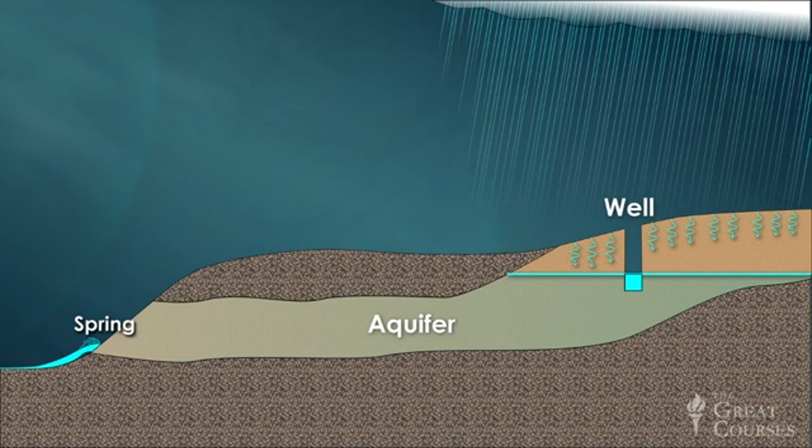So, what are the relative merits of groundwater versus surface water as sources of drinking water? Well, practically from the dawn of civilization, humans have obtained groundwater by tapping into underground aquifers. Recall that an aquifer is a porous stratum of soil or rock in which groundwater collects.

Groundwater can be obtained from an aquifer in two ways. One is to dig a well down into the aquifer, allow the water to collect at the bottom, and then lift or pump it up to the surface. The other is to find a spring, a place where an aquifer intercepts the surface, resulting in groundwater flowing freely back to the surface like this.

Now, in the ancient world, these groundwater sources were generally preferred over surface water because early civilizations usually dumped their raw sewage into rivers and streams, thus making the surface water unsuitable for human consumption.

Today, groundwater sources, particularly wells, remain in widespread use, particularly in rural areas and small municipalities. However, wells generally don't provide an adequate quantity of water for larger urban water systems, and they're unsuitable in regions where the groundwater is subject to pollution or is too far below the surface to be economically extracted.

Meanwhile, modern measures for controlling water pollution and more effective water purification technologies have resulted in surface water becoming the principal source for most large-scale water systems today.

A water supply system for a large urban population typically includes six major elements: a watershed, a raw water collection point, a conduit through which water is transmitted from the collection point to its point of use, a water purification facility, water storage facilities, and a water distribution network.

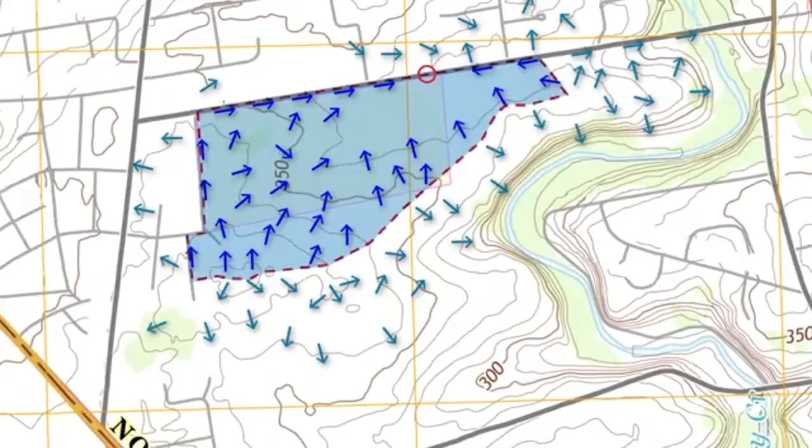Remember, a watershed is an area of land delineated such that a drop of rainwater falling anywhere on that area eventually drains to the same outlet. Thus, a watershed serves the very useful function of collecting the precipitation falling on a large area of land and then concentrating it in a single watercourse, where it can serve as the source for a water supply system.

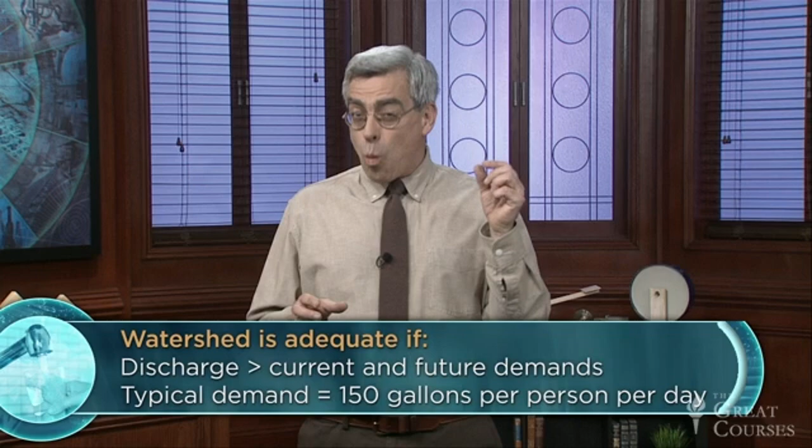A given watershed will be adequate as a water supply for a city or town if the quantity of water discharged from the watershed exceeds the current and anticipated future demands of the population being supplied. The demand on a municipal water supply system is typically estimated as about 150 gallons per person per day.

No, people don't actually drink that much. Most of this water flows through our dishwashers, washing machines, sinks, toilets, tubs, and showers, at which point it becomes wastewater and is disposed of. Still, whether we drink it or shower with it, 150 gallons per person per day is a lot of water.

At this rate, a modest-sized town of 10,000 people consumes 1.5 million gallons per day, or over 500 million gallons per year.

Some cities are able to meet this huge demand by drawing water directly from major rivers or lakes. For example, Philadelphia gets its water directly from the Delaware River, and Chicago from Lake Michigan. And by the way, in case you were wondering, Chicago's annual consumption of water constitutes roughly 1/100th of a percent of the water in Lake Michigan, an amount that's easily replenished by the rivers and streams flowing into the lake.

Now, in most cases, the quantity or quality of a municipality's local water supply is inadequate, and it must look to a watershed some distance away, often in a less developed region with fewer sources of pollution.

Even if a given source provides an adequate quantity of water on an annual basis, seasonal variations in rainfall, and therefore in stream flow, might cause shortfalls at certain times of year. To cope with this, the typical urban water supply system uses a dam to create a storage reservoir which receives a variable inflow but holds enough water to provide a steady outflow.

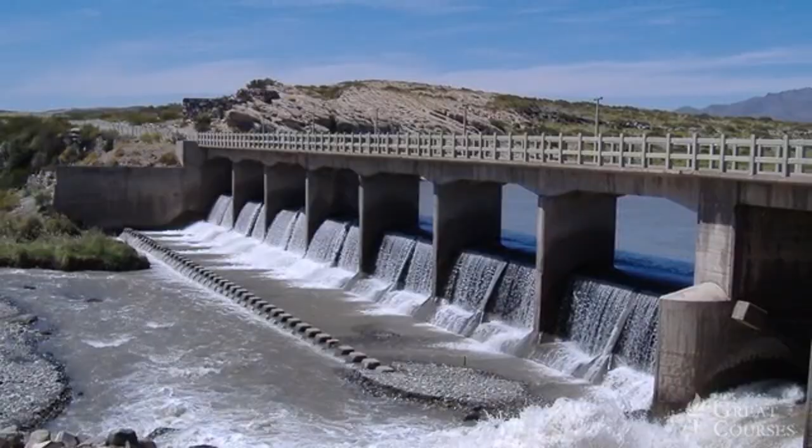No aspect of everyday engineering better exemplifies the grandeur of our civil infrastructure than a dam. So let's talk about dams.

A dam is an engineered structure designed to impound water, generally by blocking the flow of a natural watercourse. A dam creates a reservoir and must also control the release of water from that reservoir.

Dams are used for water supply, irrigation, flood control, and, as we'll discuss later in the course, for the generation of hydroelectric power. They also create recreation areas, though this is generally a positive side effect rather than the principal purpose of a dam.

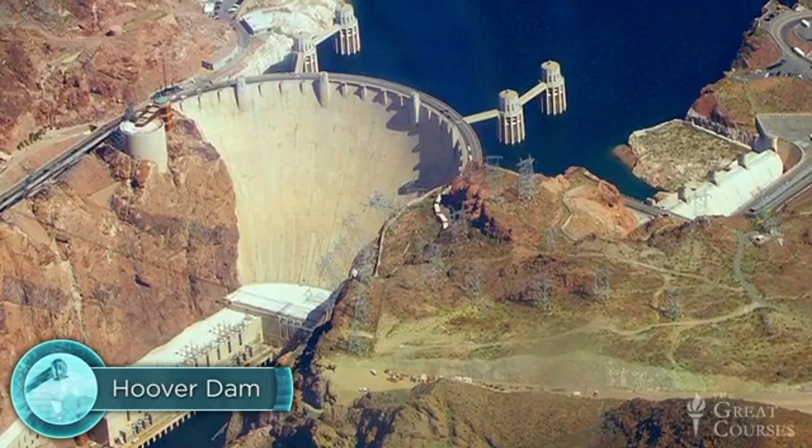Many dams serve several of these purposes simultaneously. The iconic Hoover Dam, for example, was originally intended primarily as a source of irrigation water, but it also incorporates a huge hydropower generating facility, supports a wide variety of recreation facilities along the shores of Lake Mead, and it has occasionally mitigated the effects of Colorado River flooding.

A dam is generally classified according to two characteristics: its principal construction material, which might be concrete, masonry, soil, or rock, and its structural configuration, either an arch dam or a gravity dam.

Let's start with the arch dam, and more fundamentally, with the arch itself. When an arch is used in a bridge or a building, it's generally oriented vertically like this, and the loads that are applied to it are applied vertically as well.

An arch carries load primarily in compression, and it can carry a tremendous amount of load, provided that two critically important conditions are satisfied. First, it must be made of a material like concrete or stone that's very strong in compression. Second, it must be laterally supported at its base to restrain the ends of the arch's natural tendency to spread outward as it's subjected to a vertical loading.

My model here is made of concrete, and it does indeed have appropriate lateral supports represented by these two pieces of wood out at the ends of the arch. So it ought to work reasonably well.

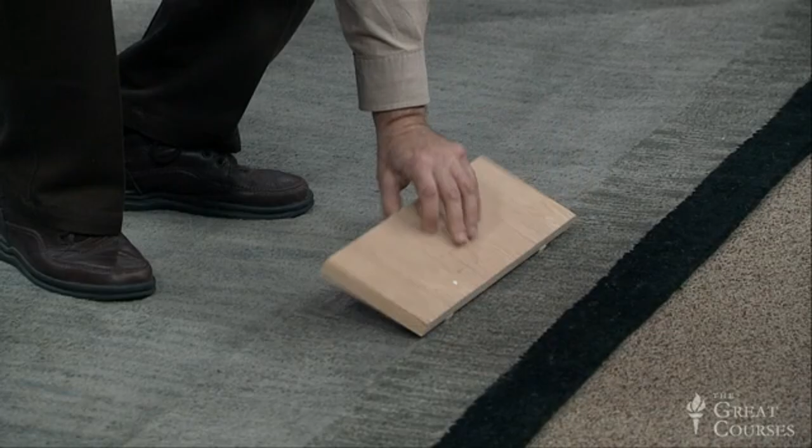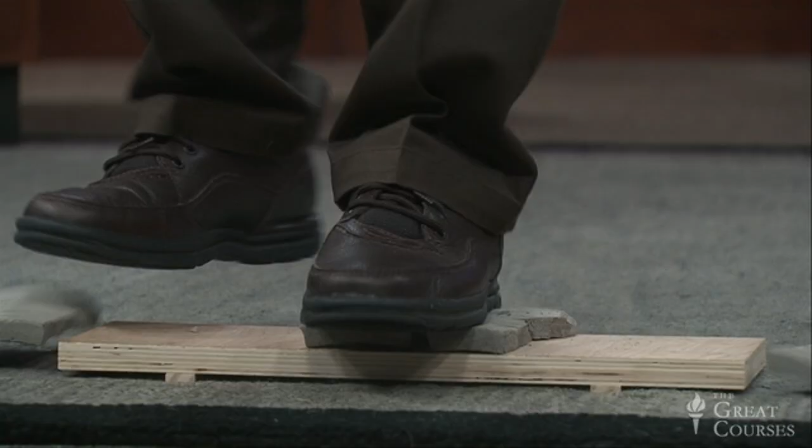However, if we take the same arch and put it on the same supports, but flip the support upside down so that those lateral restraints are no longer engaged, and apply the same load to the same arch, the effect is considerably less favorable.

Now let's take an identical arch right here, and we'll turn it sideways, and we'll place it in a river valley to create a dam. Now we have an arch dam, and at this point we're ready to fill our reservoir.

Not bad. It leaks just a bit because I didn't have an opportunity to seal it after I installed it, but structurally this dam works just fine because both the arch and the load that's applied to the arch are now oriented horizontally. The load is hydrostatic pressure.

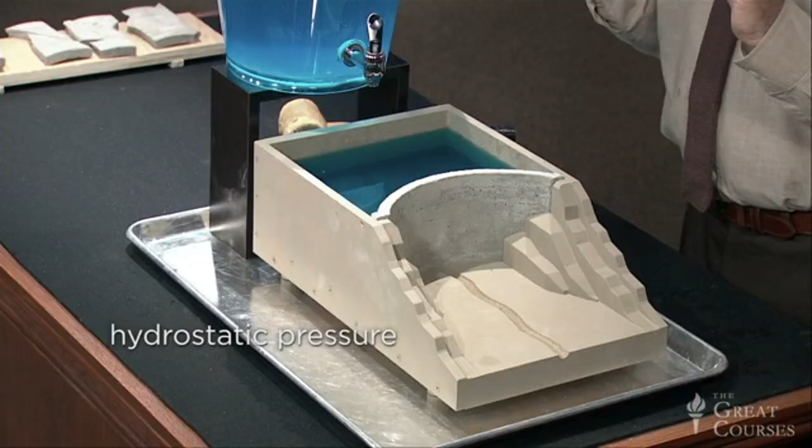That's the same pressure that's applied to your basement walls by groundwater. As you recall, hydrostatic pressure always acts perpendicular to a submerged surface. Here, the submerged surface of the dam is vertical, so the pressure is applied horizontally.

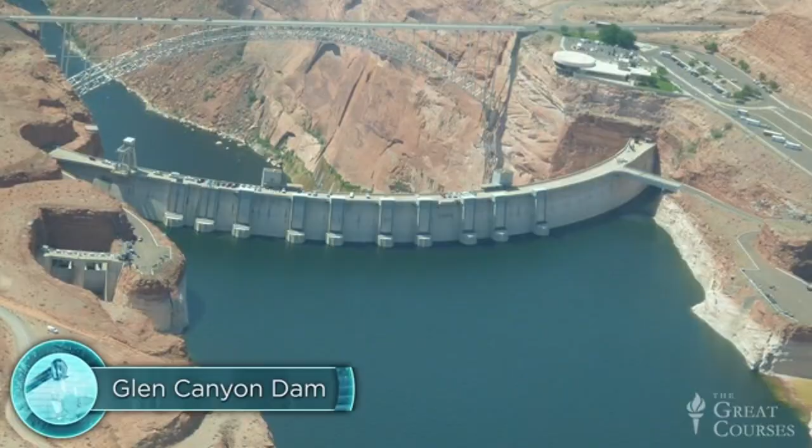Note also that the lateral support to this arch is provided by the walls of the river valley. And that's why dams like this one, the Glen Canyon Dam in Arizona, are always built in steep valleys with solid rock walls.

The other major structural configuration is the gravity dam, which attains its structural load-carrying capacity primarily from its mass. There are two principal types of gravity dams based on whether the construction material is concrete or masonry on one hand, soil or rock on the other.

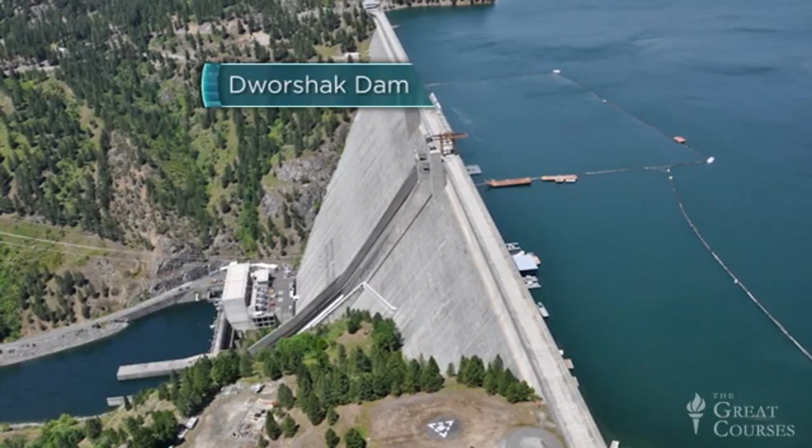The Dworshak Dam in Idaho is a fine example of a concrete gravity dam. Note that this structure isn't curved, so it doesn't rely on arch action to carry load. So how does it carry load? Well, let's use a diagram of the dam's cross-section to answer this question.

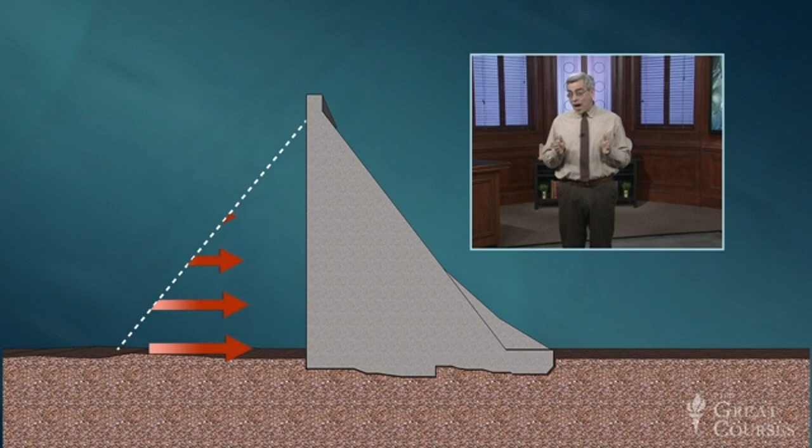Because the dam's upstream face is essentially vertical, the hydrostatic pressure acts horizontally upon it. Assuming the concrete itself is sufficiently strong, there are really only two ways that this structure can fail: it can either slide horizontally or it can tip about its toe, like this.

As long as the base of the dam is keyed into solid bedrock, as you see here, it can't slide. Thus, the design of the dam's cross-section is governed primarily by tipping.

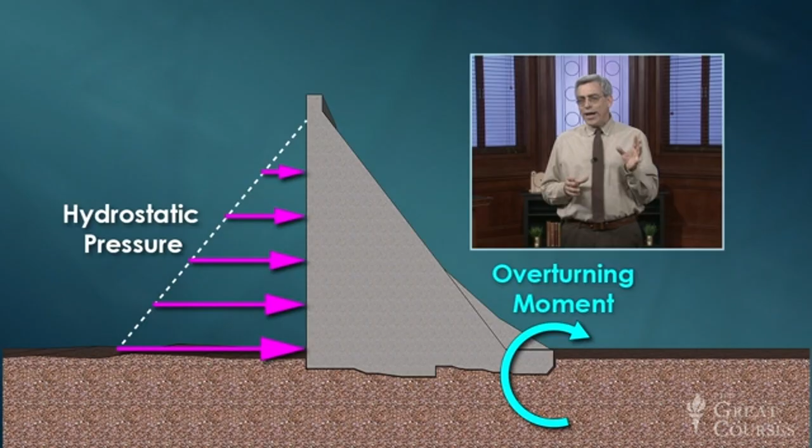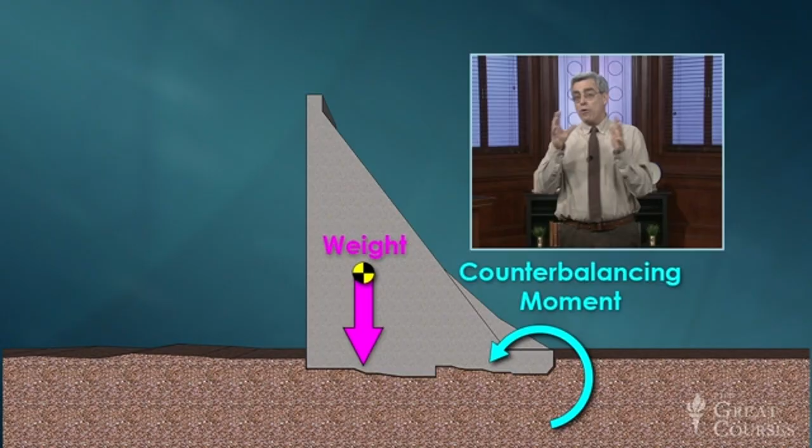The tendency of a force to cause rotation is called a moment. So we say that hydrostatic pressure causes an overturning moment about the toe of the dam, while the dam's weight causes a counterbalancing moment about the same point. As long as the counterbalancing moment is greater than the overturning moment, the dam won't tip.

Mathematically, the counterbalancing moment is equal to the dam's weight times the horizontal distance from the toe to the dam's center of gravity. Thus, to prevent the tipping failure of a gravity dam, it must have both adequate weight and adequate width. That's why concrete gravity dams like the Grand Coulee Dam shown here are always massive and wide.

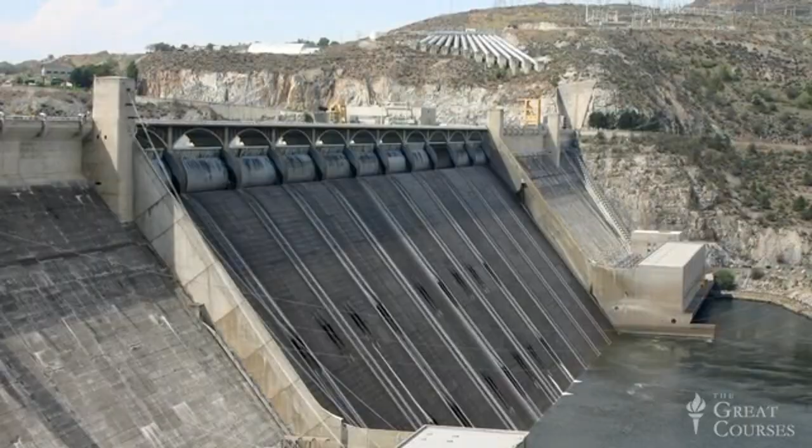Monumental concrete dams like this one are impressive structures indeed. Yet at the opposite end of the technological spectrum, we'll find gravity dams that are, in many ways, even more fascinating. These structures are made of the least sophisticated structural materials available, soil and rock, but involve surprisingly sophisticated engineering. They're called the Earth Dam and the Rockfill Dam.

Here's a valley with a stream running through it. We'll begin construction by installing the outlet works—that's a conduit and associated equipment that will eventually be used to control the release of water from the reservoir. I'm going to place it right into the middle of the river valley, and once it's in position, this allows the stream to be diverted through the outlet works so the water won't accumulate in the valley while we're building the dam.

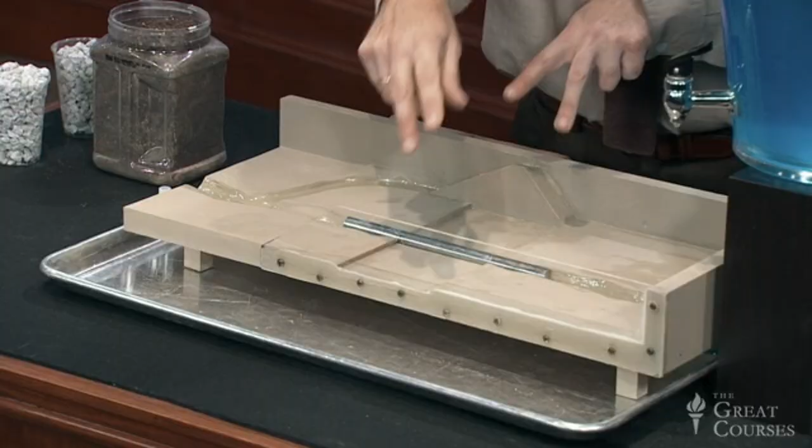Now here, in the center, at the future location of the base of the dam, we would clear away all the topsoil until we've reached bedrock or a strong stratum of underlying soil. On this solid foundation, we'll build the core of the dam using this trapezoidal mass of clay.

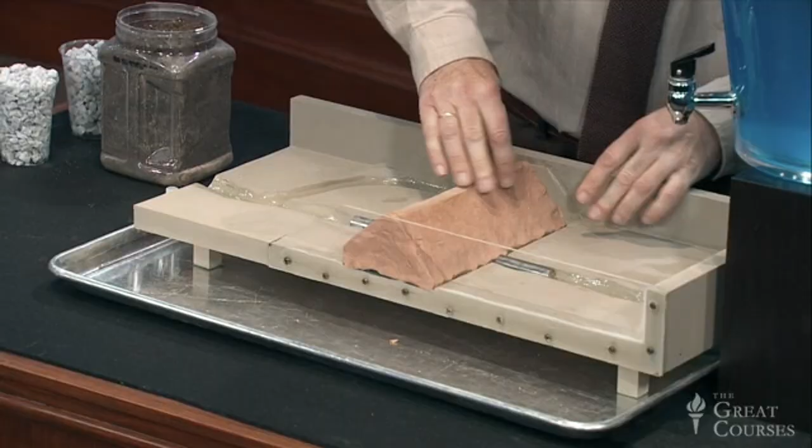Clay is an extremely fine-grained soil formed from the weathering of silicate-bearing rocks. It has a very unique microstructure, which makes it highly cohesive. That means it's capable of holding its shape without crumbling, and also highly impervious to water—a particularly advantageous property for the core of a dam.

Take a minute to make sure our clay core is properly sealed around the edges of the valley, and most importantly, at its foundation down here. And we're ready for the next stage of construction.

Now, a dam can't be made entirely of clay because this material would be very easily eroded, and it doesn't have the mass necessary to resist the hydrostatic pressure that the completed dam will be experiencing. Thus, we need to cover both faces of the core with gently sloped layers of compacted fill.

If this fill is soil, then the structure is called an earth dam. If it's primarily rock, then we call it a rock fill dam. In this case, let's build an earth dam.

I'm going to take some soil, deposit it on what we'll call the upstream side because the stream is flowing from your right to left. And we're going to fill that region in and completely cover over the upstream face of our clay core.

And I'm going to do the same on the downstream face with another layer of soil. We're going to smooth that out and compact it so we have a nice, clean, smooth face for the formation of the dam. And I'll do the same on the downstream face.

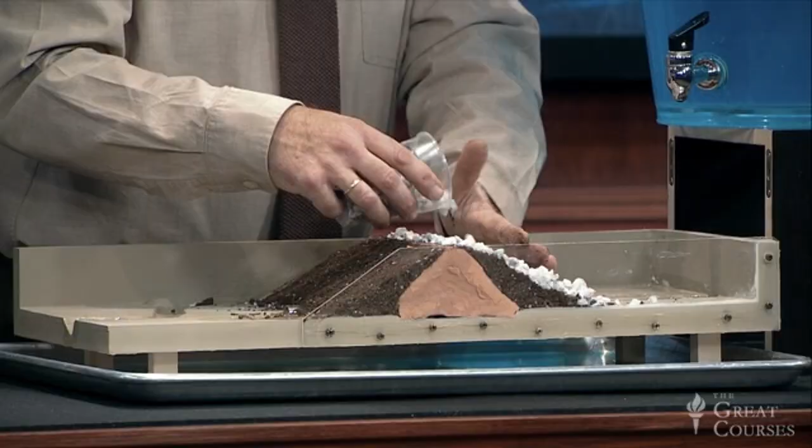Whether we're talking about soil or rock fill, all of these layers add both strength and mass to the structure and therefore improve its overall stability.

In addition to the armoring on the upstream face, it's also common practice to plant vegetation on the downstream face in order to further stabilize the soil and prevent erosion. In this photo of the Saint-Cassien Dam in France, you can clearly see these protective layers: stone on the upstream side and vegetation on the downstream side.

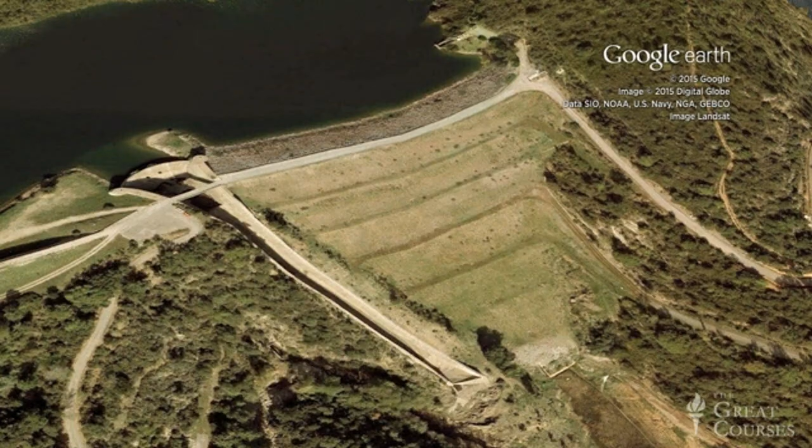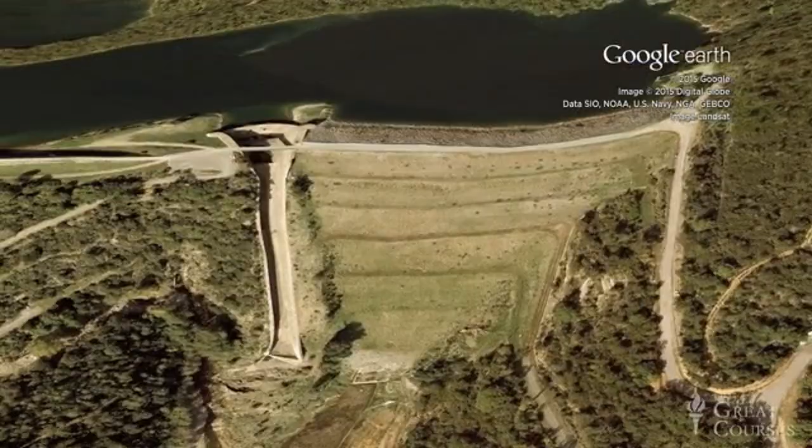Also notice this elaborate concrete chute along the side of the dam. This structure is called a spillway, and it's used for the controlled release of surplus water to prevent the dam from being overtopped. This is a particularly important feature of earth and rockfill dams, where overtopping can very quickly erode the protective fill on the dam's downstream side and lead to a catastrophic collapse.

For this reason, spillways are very carefully designed using the science of hydraulics to guide their size and shape. The graceful curved shape of this elaborate concrete spillway on the otherwise simple Anderson Ranch Rockfill Dam is specially configured to minimize turbulence, which could damage the channel in a major flood.

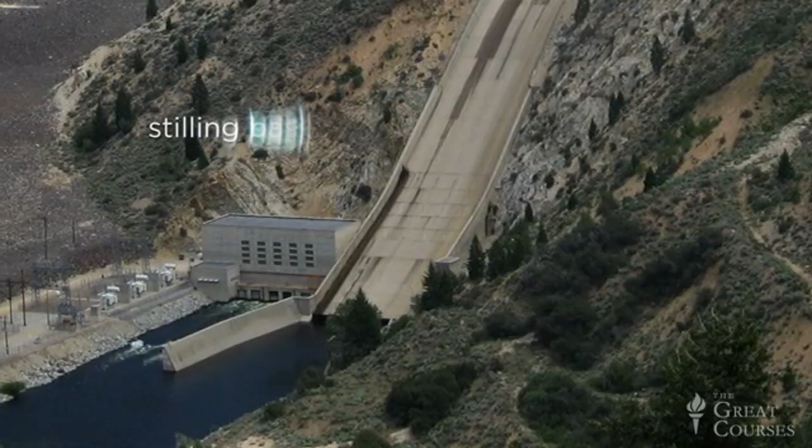The pool at the bottom, called a stilling basin, is designed to dissipate the energy of that high-velocity stream plunging down the spillway to prevent scouring that might undermine the foundation at the toe of the dam.

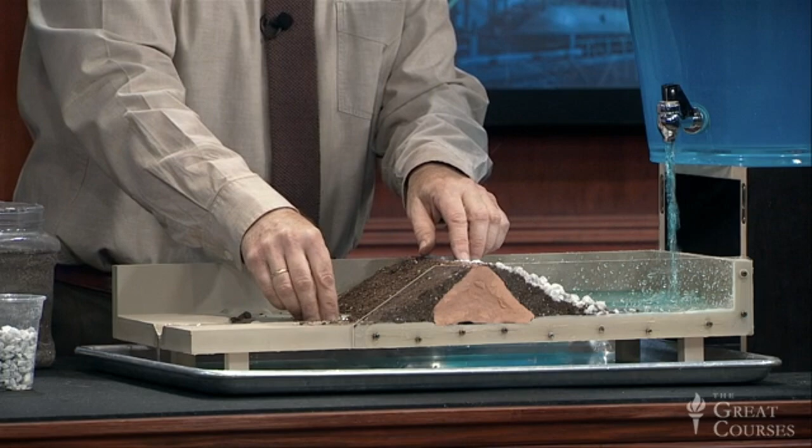Now note that my model also incorporates a spillway here along the valley wall at the edge of the dam. With the stream running, I will now close off the outlet works so that we can fill our reservoir.

So here's the normal configuration of our dam and reservoir. But if heavy rains come along and cause flooding, we can see how the excess water is channeled down through the spillway and into the outlet channel before it can overtop the remainder of the dam and cause a failure.

Now, in contrast with the spillway's use in emergency or extraordinary situations, the outlet works down here are used to control the routine release of water from the reservoir to fulfill the dam's intended purpose.

For a water supply dam, gates or valves on this conduit are used to regulate the flow into a pipeline, aqueduct, or canal. For a flood control dam, they control the reservoir elevation by regulating downstream flow. For a hydroelectric power facility, they regulate the flow to the turbines.

Now, so far our dam looks reasonably dry, but it's important to recognize that all earth dams experience some seepage. So if we wait around long enough, we'll surely see some water accumulating here on the downstream side. Accommodating this seepage is an integral aspect of dam design.

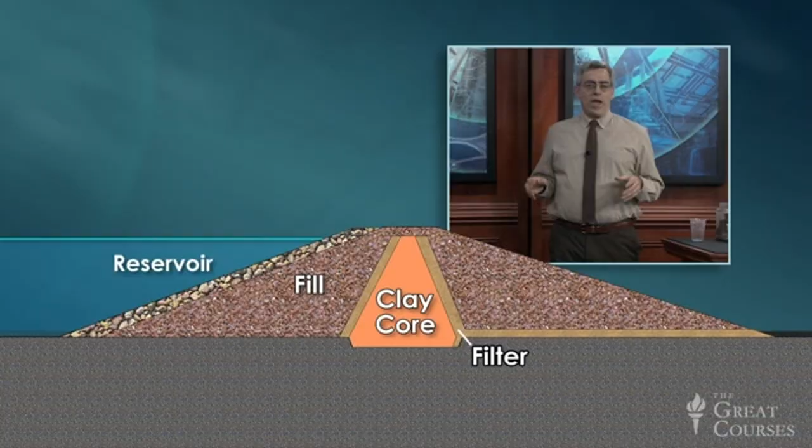This diagram shows a typical cross-section of an earth dam. Here's the impervious clay core, and here are those outer layers of compacted fill. In between is a filter, a seam of specially selected permeable soil that captures seepage and directs it safely out of the dam, while retaining the fine-grained clay core in its proper position.

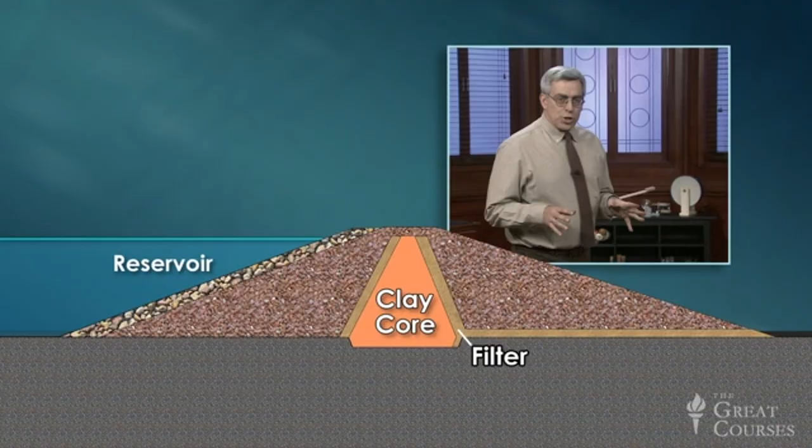The most obvious difference between an earth gravity dam and a concrete gravity dam is the very shallow slope of the earth dam's outer faces. As you might expect, this feature enhances the stability of the earth embankment. Shallow slopes are much less susceptible to landslides than steep ones, but it also has a very beneficial effect on the dam's loading.

Recall that hydrostatic pressure always acts perpendicular to the surface of a submerged body. Thus, the pressure on the upstream face of an earth dam looks like this. Its orientation is now more downward than horizontal, and so it actually compresses and further stabilizes the earth fill, while also decreasing the horizontal force on the dam and increasing the friction between the bottom of the dam and its foundation.

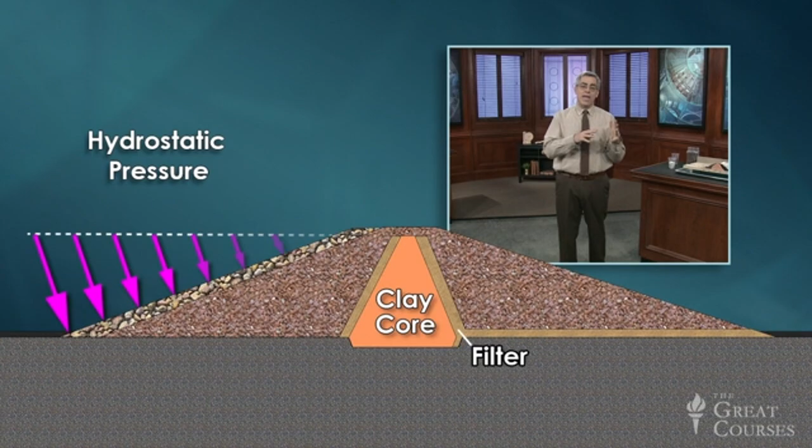Well, now that you've seen how various types of dams work, you're probably wondering how engineers decide which type to use in a given situation. In general terms, concrete dams are preferable to earth and rock-fill dams where the reservoir needs to be very deep, a situation that's usually dictated by the topography of the valley, the required water storage capacity, or the need to generate hydroelectric power. Topography also has a major influence on a dam's structural configuration.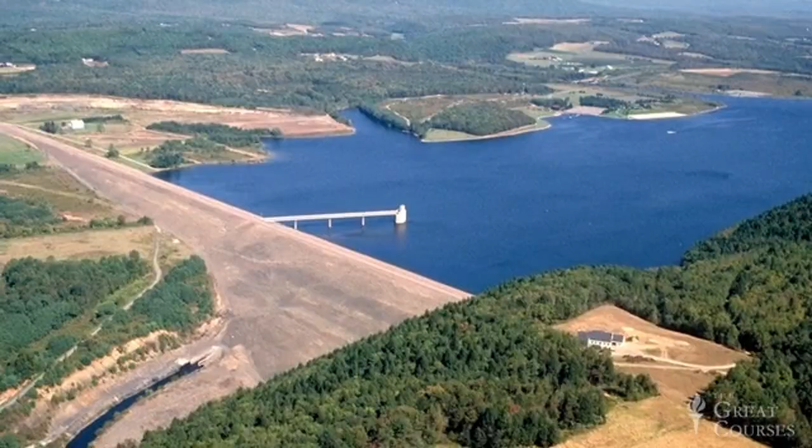A deep V-shaped valley with a solid rock wall is ideal for an arch dam. A somewhat wider valley with high walls would favor a concrete or rock-filled gravity dam. A broad, low valley would generally call for an earth dam, particularly if the valley floor were covered with a deep layer of alluvial soil, because earth dams don't necessarily have to be constructed on bedrock as concrete dams do.

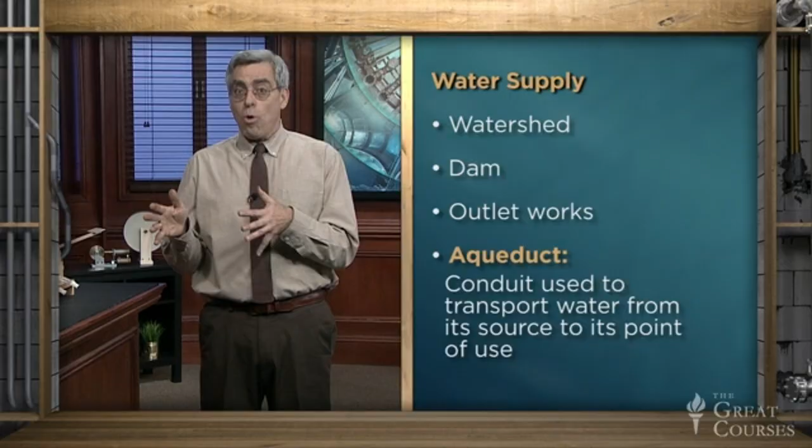Returning to our broader examination of water supply, we've now discussed the watershed, the dam that impounds runoff collected by the watershed, and the outlet works, which control the flow of water from the reservoir into an aqueduct. An aqueduct is a conduit used to transport water from its source to its point of use, typically a city or town. The water channel can use any of four basic configurations depending primarily on the terrain being traversed.

We can explore all four configurations by examining a single real-world system, the Catskill Aqueduct, a 92-mile conduit that carries about 40% of New York City's water supply from an upstate watershed down to the city. Built between 1907 and 1917, the Catskill Aqueduct draws its water from a 123 billion gallon reservoir formed by a 4,650-foot dam across the Esopus Creek near Olive Bridge, New York. Driven entirely by gravity, up to 600 million gallons of water flow through this aqueduct every day.

It crosses 5 major geological regions and the mighty Hudson River, while surrendering less than 300 feet of elevation over its entire 92-mile length. The conduit ends at the 900 million gallon Hillview Reservoir in Yonkers, New York, where its water is fed into the city's equally impressive water distribution network.

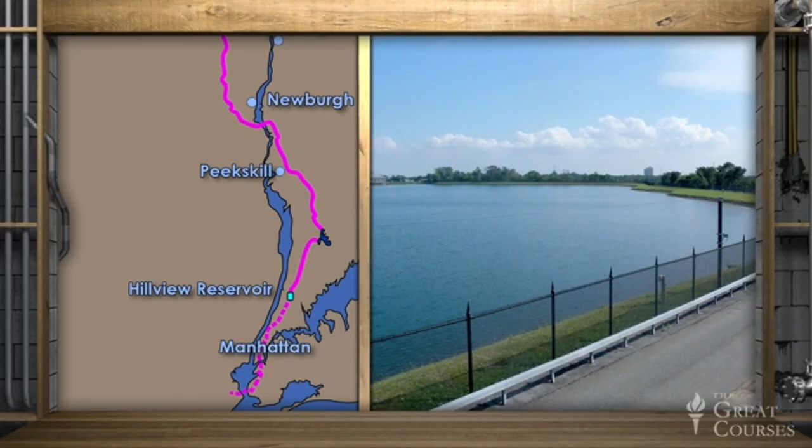This receiving reservoir serves two functions. It provides a reserve of several days' water supply in case the aqueduct needs to be temporarily shut down for maintenance or repair, and it also accommodates the continuously changing differences between the aqueduct's relatively steady inflow and the city's hour-by-hour variations in demand, with purposeful consideration of the need to supply a huge quantity of water quickly in the event of a large fire.

Now, this model illustrates the four distinctly different channel configurations constituting the Catskill Aqueduct. Up here we see the dam and the reservoir that is formed by that dam. And what I'm going to do is fill the reservoir, and with the outlet works open, we'll see how water is transmitted through the 4 different segments of the Catskill structure.

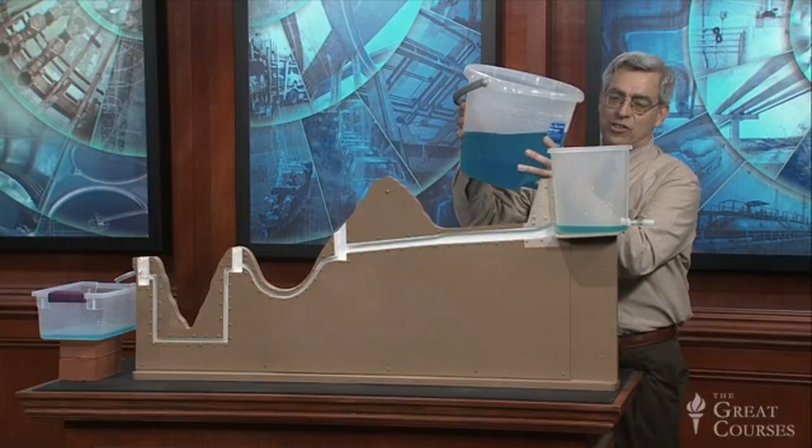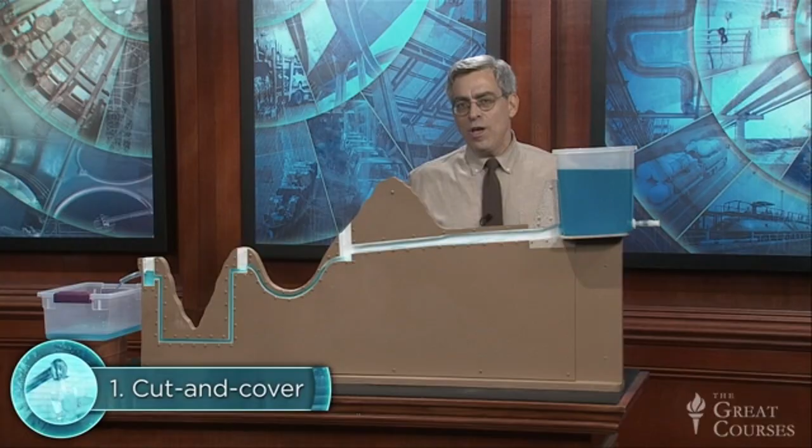The first channel configuration that we're going to talk about in the Catskill Aqueduct is called cut and cover, constituting about 55 miles or 60% of the aqueduct's total length. This segment of my model represents a cut and cover segment.

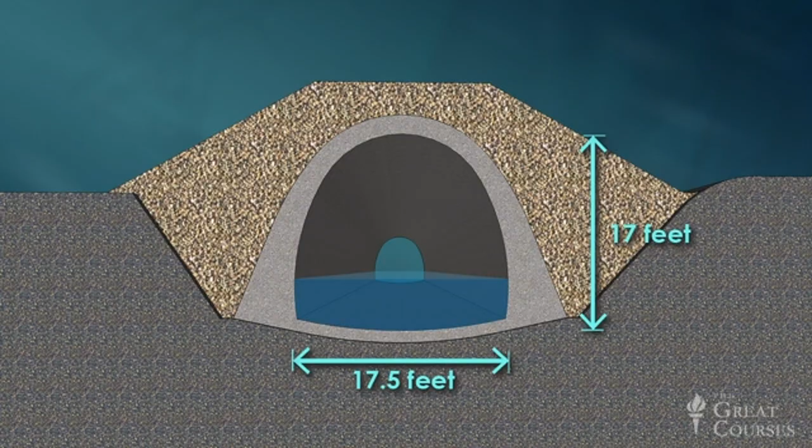This drawing shows the standard cross-section used for all cut and cover segments in the Catskill system. It was built by cutting a shallow trench into the soil and then casting this horseshoe-shaped concrete tube 17.5 feet wide and 17 feet tall, and then covering the tube with a soil embankment. Longitudinally, this channel is constructed on a constant downhill slope of 1 foot of elevation for every mile of length, following the contours of the earth as necessary to maintain this gradient.

Don't you just love the sound of flowing water?

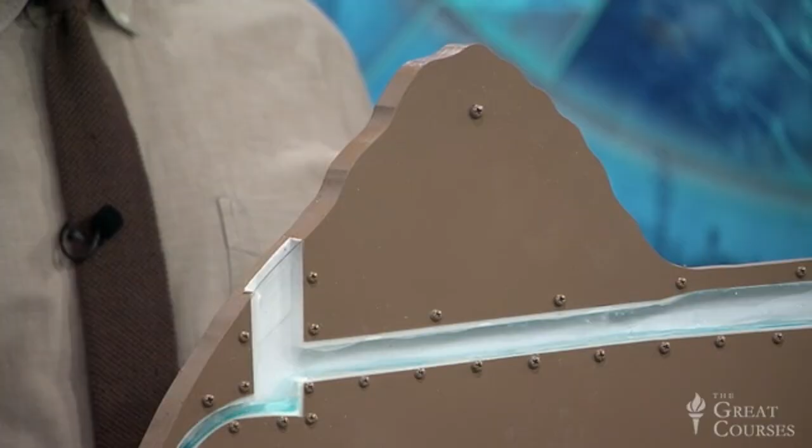So the next 15% of the Catskill Aqueduct consists of something called a grade tunnel, which is designed to carry the channel through mountains of solid rock at 23 different locations along the route. The grade tunnel in my model is represented by this section here.

And note in my model that both of those features are present. In the grade tunnel segment of the model, you see that the channel height is reduced just a little bit, and the slope is increased just a bit as well. This increased gradient allows the water to flow faster, thus compensating for the reduction in channel size at the grade tunnel locations.

Now, in the science of hydraulics, the movement of water in both cut and cover conduits and grade tunnels is classified as open channel flow. This might seem odd because both of these channel configurations are fully enclosed in the Catskill Aqueduct. But the technical definition of open channel flow requires only that the moving fluid has a free surface. In other words, the conduit flows only partially full, with the water at the surface at atmospheric pressure.

To maintain its flow, an open channel requires a steady downhill gradient, just as we've seen with the cut and cover and grade tunnel segments of the Catskill Aqueduct. The concrete covers over these channels don't have any effect on the flow within. Rather, they just serve to protect the water from evaporation and contamination.

In contrast, the remaining 2 configurations used in the Catskill Aqueduct are characterized by true pipe flow, with their conduits flowing full and under pressure, and thus with no requirement for the channel to assume a continuous downhill gradient.

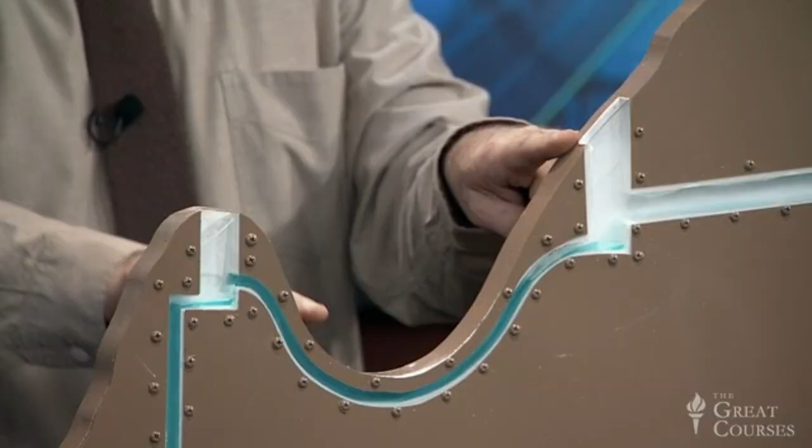One of these two pipe flow segments is the inverted siphon, represented here in my model. Its purpose is to transmit water across a valley with a pipeline placed at ground level. Water will flow through an inverted siphon even though a portion of its journey is uphill, as long as the upstream water level is higher than the downstream water level. This elevation difference supplies the pressure that keeps the water moving through the siphon.

The Catskill has 14 of these structures, constituting about 7% of the aqueduct's total length. To resist their substantial internal pressure, the Catskill siphon pipes were constructed of huge steel cylinders, each 11 feet in diameter and 9.5 feet long, riveted together, lined with mortar on the inside, encased in concrete on the outside, and then covered with a protective layer of soil.

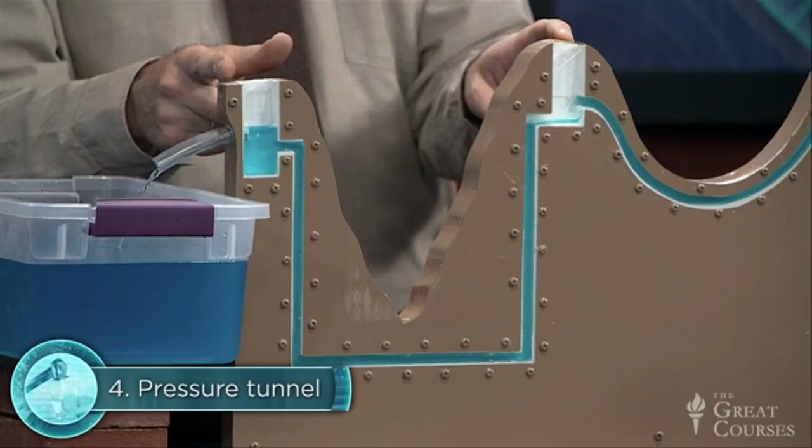Impressive as these structures are, they pale in comparison with the fourth channel configuration used in the Catskill system, the pressure tunnel. These, represented by this final segment in my model, total 17 miles, or 18% of the aqueduct's total length. Their purpose is to carry water across particularly deep valleys and deep rivers, locations where a surface level siphon simply wouldn't be feasible.

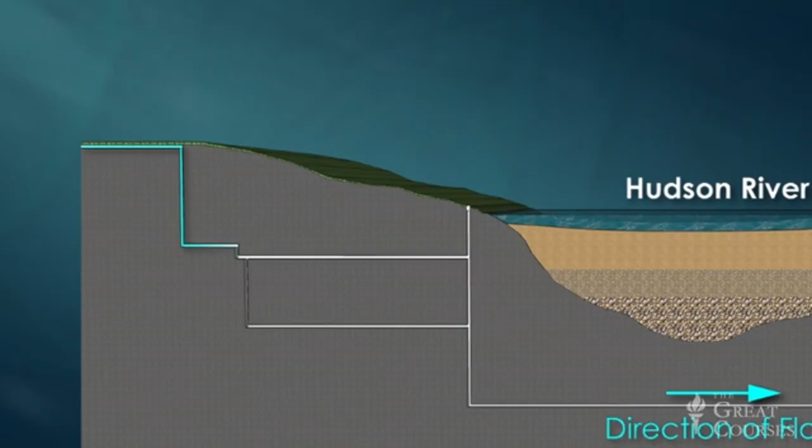By far, the most impressive of the Catskill pressure tunnels is the one that passes underneath the Hudson River at a place called Breakneck Ridge. Here we see the profile of this astonishing six-mile system, with water entering from a cut and covered channel several miles from the river, then plunging through a series of vertical and horizontal shafts, bottoming out 1,114 feet below the surface of the Hudson, and then ascending to the eastern shore. All of these shafts are 14-foot diameter concrete-lined conduits.

No doubt you recognize that a pressure tunnel works in exactly the same way as an inverted siphon. The only difference between them is that the pressure tunnel is bored through bedrock, while the inverted siphon is placed on the ground surface of the valley.

The extraordinary 1,100-foot depth of the Hudson River pressure tunnel was required because the riverbed at this location is covered with nearly 800 feet of loose alluvial material that wouldn't have allowed for a watertight tunnel. This depth was also dictated by the need for the weight of the rock above the tunnel to offset the extremely high internal pressure of the water flowing through the conduit.

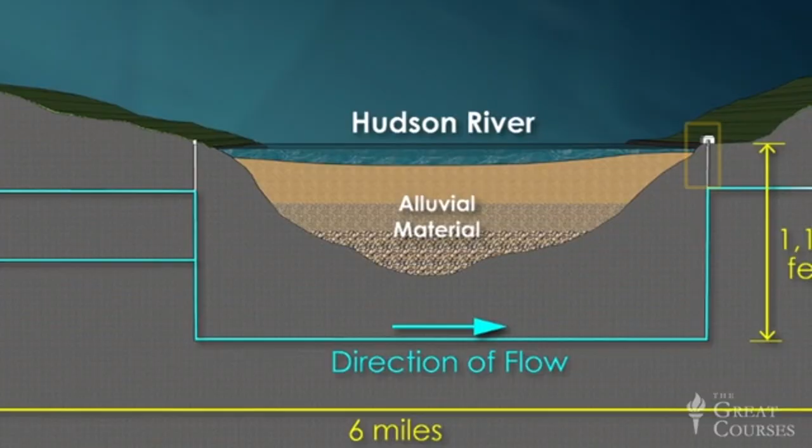Interestingly, these two segments of vertical shaft were essential for access to the pressure tunnel during construction, but then they had to be sealed up to preserve the internal pressure that makes a siphon system work. The downtake shaft on the west bank was sealed permanently with a 50-foot plug of concrete, but the uptake shaft on the east bank was sealed with a 46-ton steel dome that can actually be removed for maintenance access.

The steel dome is housed inside this beautiful, if somewhat time-worn, stone building, providing the only visible indicator that the Hudson Pressure Tunnel, one of the world's great civil engineering achievements, lies hidden 1,100 feet below.

In this course on everyday engineering, an extraordinary engineered system like the Catskill Aqueduct might seem a bit out of place. Certainly, its scope and complexity are not entirely representative of the smaller, simpler water supply systems used by most municipalities. Yet each of these smaller systems applies the same basic hydraulic concepts as the Catskill, and each employs some of the Catskill's technologies, albeit in simpler form. More important, the Catskill Aqueduct stands as a powerful reminder that sometimes everyday engineering is anything but mundane.

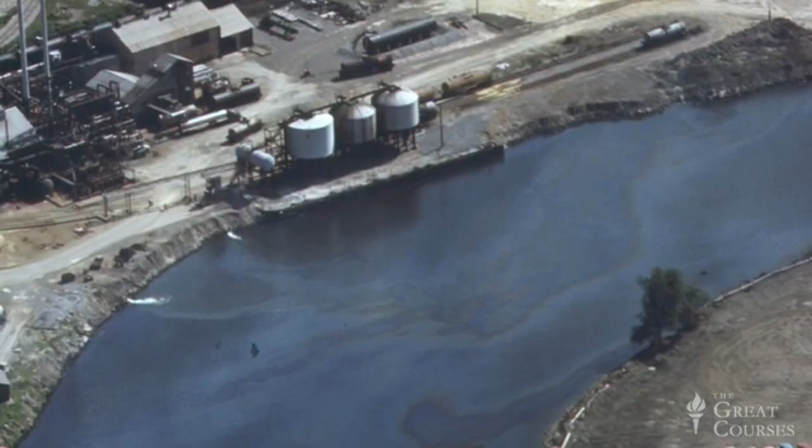Raw water from certain kinds of sources, an upland spring or a deep groundwater well, for example, might be reasonably pure and potable, that is, safe for drinking. But most raw water, particularly surface water, is loaded with contaminants, some of which can be extremely hazardous to human health.

These contaminants include microorganisms such as viruses, bacteria, and protozoa; dissolved salts and metals like sodium, calcium, and magnesium; other inorganic chemicals like arsenic, asbestos, cadmium, lead, mercury, nitrates; organic chemical compounds like benzene, dioxin, and polychlorinated biphenyls or PCBs; and even radioactive uranium and radium.

Some of this contamination is beyond human control. For example, the Legionella bacteria, which causes Legionnaire's disease, is found naturally in the environment. Arsenic, lead, mercury, and radioactive particles can originate from the erosion of natural deposits. Calcium and magnesium are dissolved into groundwater when it percolates through geologic formations of limestone, chalk, or dolomite—and by the way, this process is the cause of so-called hard water.

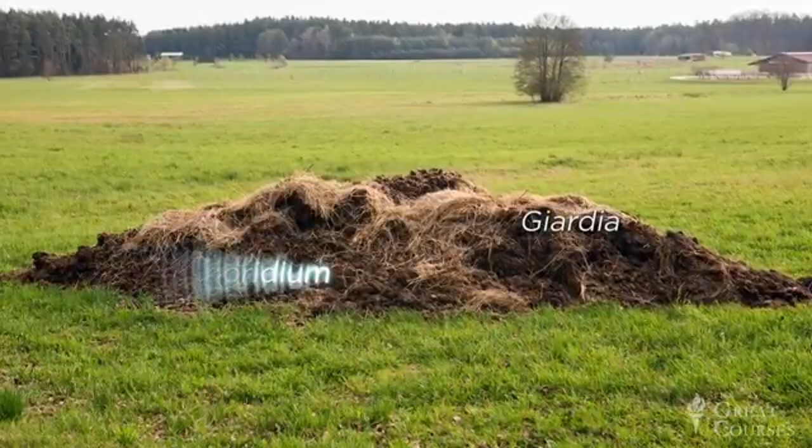But most contamination of raw water is caused by human activity in the watershed. Dangerous pathogens like Cryptosporidium and Giardia originate from human and animal feces. Many chemical contaminants are discharged from industrial facilities, petroleum refineries, steel mills, chemical plants, pulp mills, and mines. Cadmium enters our water from the corrosion of galvanized steel pipes and improper disposal of batteries and paints. Nitrates come primarily from fertilizers, carried from agricultural land and residential yards by storm runoff. Much organic chemical contamination originates from the use of herbicides and insecticides, again transported into our water supply by storm runoff.

Clearly then, water quality can be improved to some extent by controlling the human causes of contamination: designing effective sewage treatment and stormwater management systems, constructing landfills with proper containment, minimizing industrial pollution, using agricultural methods that control erosion and reduce excess application of fertilizers and pesticides, refraining from using these chemicals in our own yards, and promoting the responsible handling and disposal of fuel, motor oil, batteries, and other hazardous materials. When implemented comprehensively and conscientiously, these sorts of measures can significantly reduce the contamination of our raw water sources, but...

...they can't eliminate it. Agriculture and manufacturing are integral to our prosperity and quality of life. Many of these industries' unhealthy byproducts are essentially inseparable from the benefits that we enjoy and are very difficult to dispose of in an effective, environmentally responsible manner. Thus, some level of contamination is practically inevitable, and municipal water supply systems always require some level of treatment.

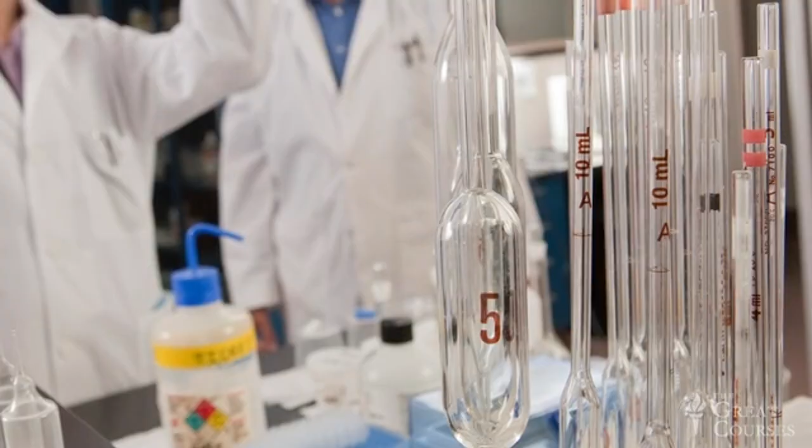This is the business of environmental engineers, the unsung heroes who design, build, and operate water treatment facilities and processes consistent with a given community's needs and available water resources. In this endeavor, the engineers are greatly aided by environmental scientists and chemists who develop the protocols and technologies for testing water to determine contamination concentrations accurately.

So let's talk about water treatment. And while our primary focus will be on your local water treatment plant, it's important to recognize that some aspects of water purification begin before the raw water ever reaches this facility.

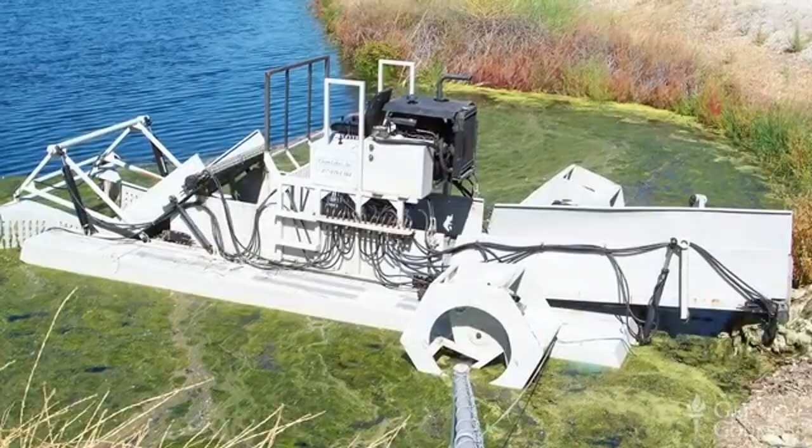Some algae and plants are toxic, but most are just a nuisance. They give the water an unpleasant taste and may foul pipelines and pumps. The best defense against algae is to deny it food by using storm runoff management to keep fertilizers out of the reservoir. If this approach isn't feasible, then the algae can be removed mechanically using a device like this algae harvester, or they can be killed by treating the water with a chemical, copper sulfate.

But this chemical must be used with some caution. Not only can copper sulfate be toxic to fish if it's used in excessively high concentrations, it can also exacerbate another problem that's often encountered in reservoir management. That problem is called anoxia, the depletion of dissolved oxygen near the bottom of a body of water.

Anoxia can occur naturally as a result of inadequate water circulation. But if copper sulfate treatments kill too much algae too fast, the loss of dissolved oxygen will be greatly accelerated by the oxidation of all this rotting organic material. Anoxia kills fish—they suffocate for lack of oxygen—and it also encourages the growth of anaerobic bacteria, which give the water a foul smell.

Today, however, environmental engineers use a technique that's less splashy but more effective. An air compressor on shore forces air through a pipe to a fixture located at the bottom of the reservoir. This device works just like the aerator in a home aquarium, sending a continuous stream of bubbles up to the surface. These bubbles add oxygen to the water in the immediate vicinity of the aerator, but more importantly, the upward stream sets up a circulation pattern that effectively turns the lake upside down, drawing the oxygen-starved water up to the surface where it can be replenished naturally.

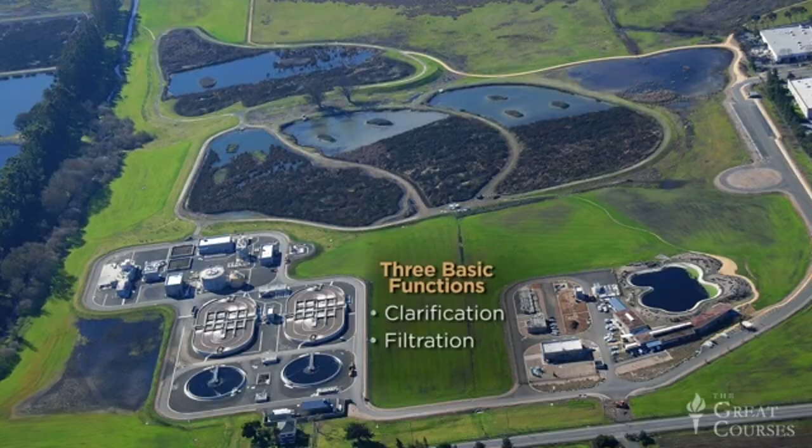Now, onward to the water treatment plant, which uses an integrated series of mechanical and chemical processes to perform three basic functions: clarification, filtration, and disinfection. Let's use this process diagram to explore step by step how these functions are performed.

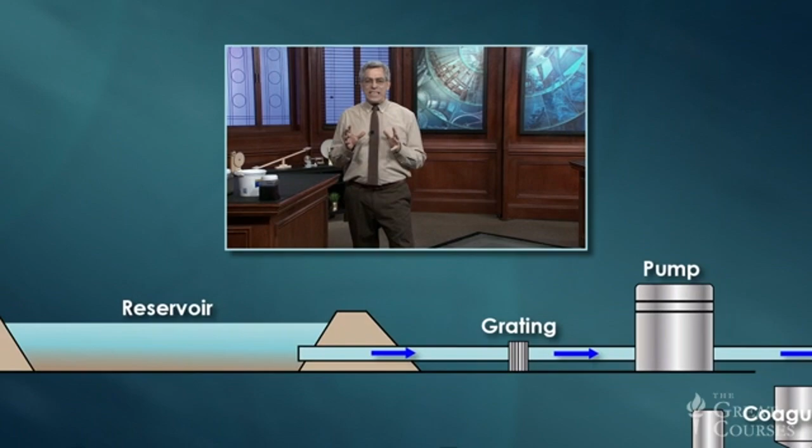As raw water is pumped from a lake, river, or receiving reservoir into the treatment plant, it passes through a series of progressively finer gratings and screens to remove trash, leaves, aquatic weeds, and critters like fish, tadpoles, and zebra mussels, which have no business swimming around in our drinking water.

The water then enters a mixing basin where a chemical coagulant is added and vigorously mixed. The purpose of the coagulant is to neutralize the electrical charges that cause suspended particles in the water to repel each other. The coagulant causes these particles to cling together, forming progressively larger clumps of impurities called flocs. This process, called flocculation, concludes when the flocs get so heavy that they settle down to the bottom of the basin. Now let's see how this clarification process works.

Here's a container of some very dirty water that I obtained from a local swamp. I guarantee you, no water this dirty is ever going to be admitted into a water treatment facility. But I've used it here just to exaggerate the effect of that chemical coagulant that I'm about to demonstrate. I'm going to mix into this water a substance called alum, a common chemical coagulant that's often used for cleaning swimming pools. I'll add the alum and mix it vigorously to dissolve those crystals into the water. We'll see how it works.

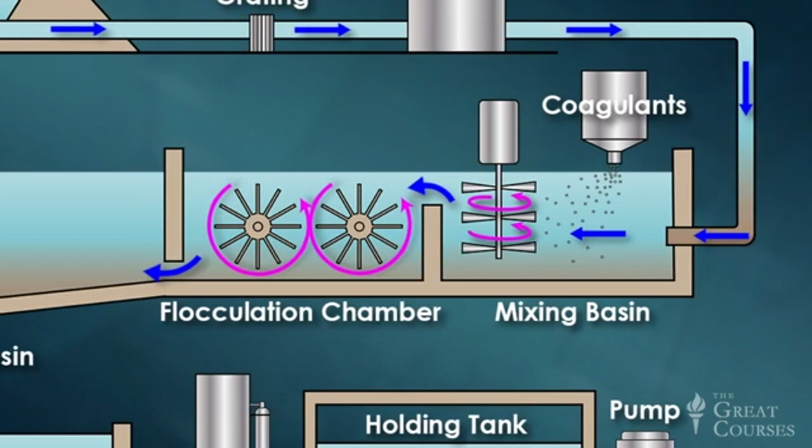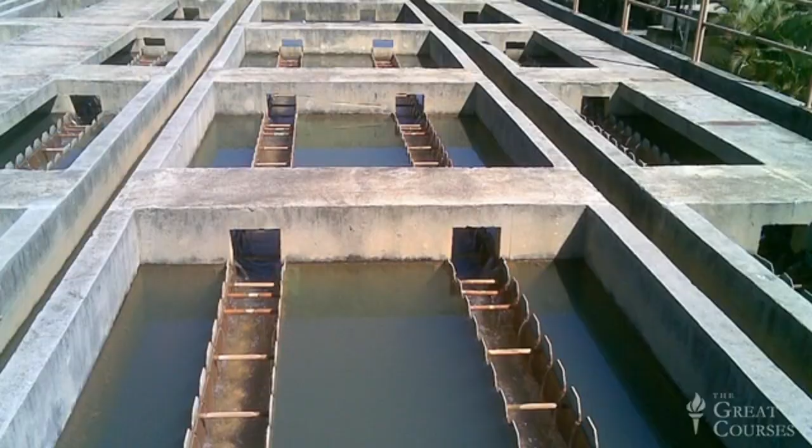Now, in the treatment plant, this mixture of raw water and coagulant passes from the mixing basin into a flocculation chamber where the coagulant does its magic. Here, the water is gently mixed so the fine particles will continue to encounter each other, but without breaking up the ever-growing flocs. With flocculation underway, the stream passes into a sedimentation basin where the water is stilled and the flocs sink to the bottom. This accumulated sludge is periodically raked out, dried, and disposed of in a landfill.

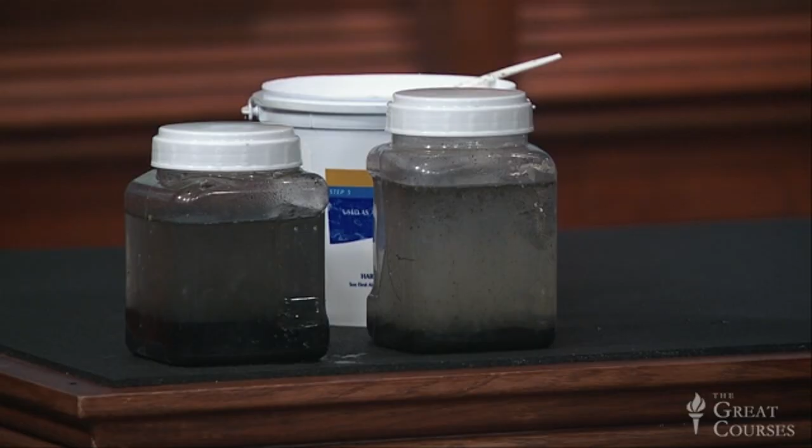It generally takes 30 minutes to an hour for the flocculation and sedimentation processes to play out, so we won't really start to see significant results in this experiment until the end of the lecture. But about 45 minutes ago, I added the same amount of alum to a sample of equally dirty water, and here it is now. It certainly isn't perfectly clean, but I think you can see why this first phase of water treatment is called clarification.

Back at the treatment plant, the clarified water is now pumped through a filter, typically composed of horizontal layers of gravel, sand, and anthracite coal. As the water passes through this filter, any particulate matter that didn't settle out during clarification is captured in the tiny voids between the sand grains. The coal serves as a source of carbon, which is particularly effective at capturing volatile organic chemicals and removing them from the water.

With filtration complete, the water is disinfected, usually by mixing in a small quantity of dissolved chlorine, which kills any bacteria or viruses that might have survived clarification and filtration. Alternative methods of disinfection include exposing the water to ultraviolet light or ozone. Both of these methods are also quite effective at killing pathogens.

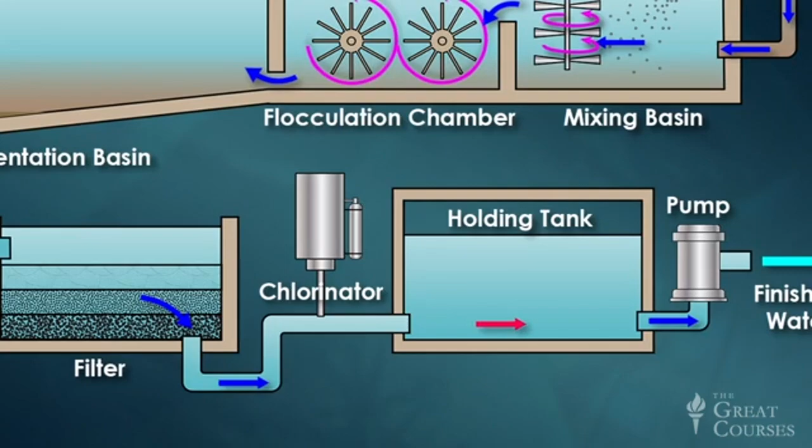Finally, the purified water passes into a holding tank, which gives the chlorine more time for disinfection while also providing a reservoir for smoothing out fluctuations in demand. At this point, the water treatment process is complete and the finished water enters the local distribution system.

But before we examine water distribution, I need to say a few words about a different type of water treatment process, a process that converts seawater into drinking water for roughly 300 million people around the globe. This process, called desalination, has been around for a long time, but it's undergoing a major surge in popularity today as a result of recent technological advances.

The most important of these is a technology called reverse osmosis, which removes salt from seawater by forcing it through a membrane under pressure. These sorts of improved technologies have cut the cost of desalination in half over the past decade.

Nonetheless, desalination is still significantly more energy intensive and therefore more expensive than treating surface water or groundwater. And its economic viability is further constrained by the fact that seawater is always obtained at a low elevation, a seacoast, and thus must always be pumped to a higher elevation and transported inland for consumption.

Another such place is Israel, where the recent construction of several high-capacity desalination plants have provided this drought-ridden country with the capacity to produce surplus drinking water for the first time in its history.

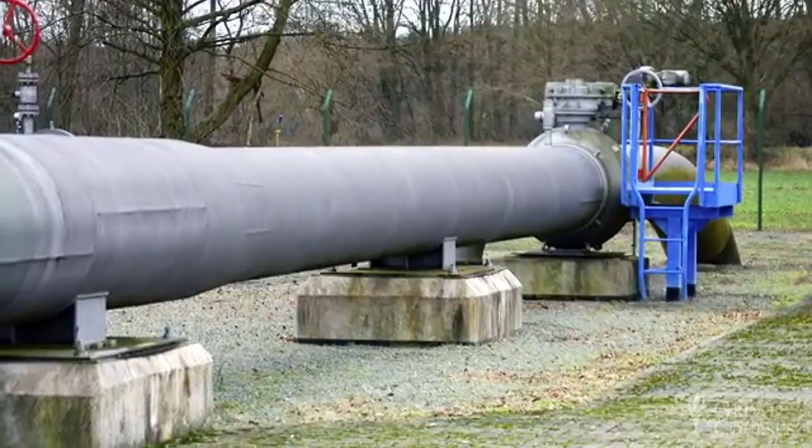To use the hydraulics terminology I introduced in the last lecture, water distribution is based on pipe flow rather than open channel flow principles. The pressure that makes a pipe flow system work can be provided by gravity, but only in the rare circumstance where the water treatment facility is located at a higher elevation than every consumer served by the distribution system. In all other cases, the pressure must be supplied by one or more pumping stations.

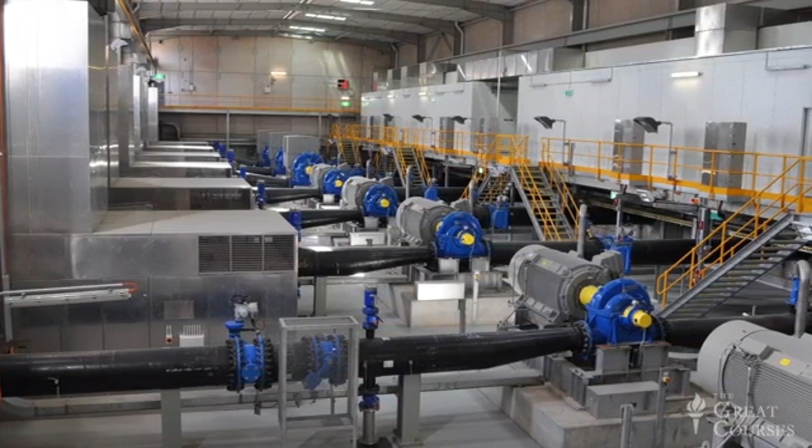The network is composed of large pipes called water mains, smaller pipes called service lines, connectors, valves, fire hydrants, and most importantly, an intermediate storage facility, which greatly enhances both the efficiency and robustness of this system.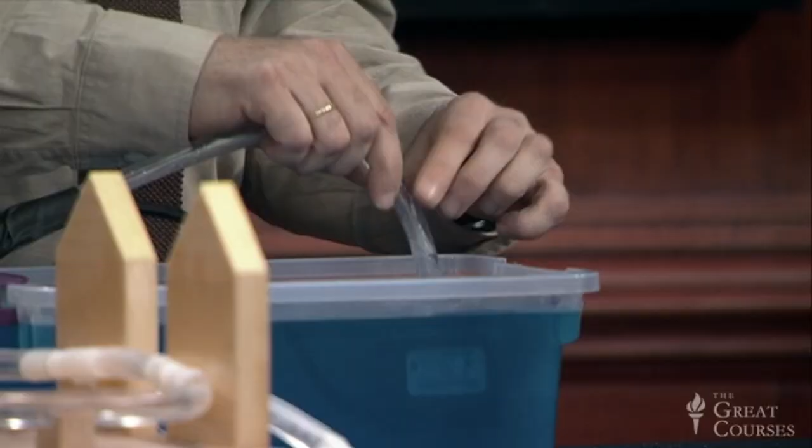Let's see how this ingenious system works. This container of water represents the finished water holding tank at a water treatment facility. I'm going to use this electric pump to represent the pumping station, and as you can see, I'm using plastic tubing to represent the water main and the service lines branching out from the water mains to individual residences.

And here is our intermediate storage facility, typically a water tower located on high ground close to the population it serves. Now let's say that it's midnight. Most of the town is asleep, so there's very little demand for water. Nonetheless, the pump is running,

and because all of these faucets and shower heads are closed, most of the water is being pumped up into the water tower through this central conduit at the base of the tower.

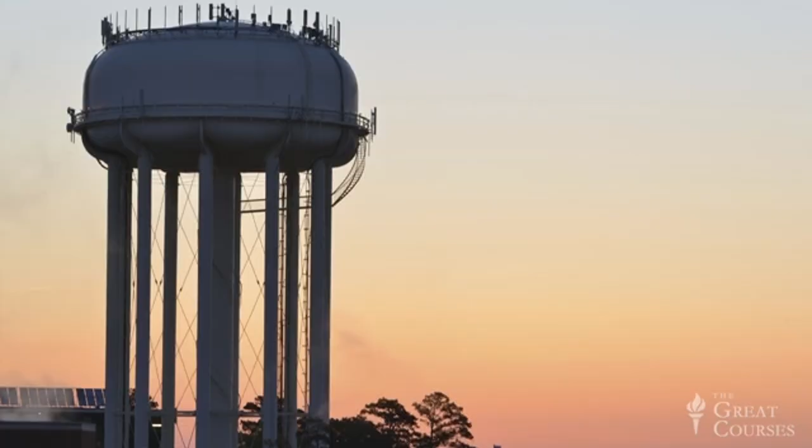By the time morning arrives, the tank is quite full, and that's good, because within a 2 or 3 hour period, practically everyone in town will open a faucet, take a shower, shave, or make a pot of coffee, resulting in significant additional demand for water.

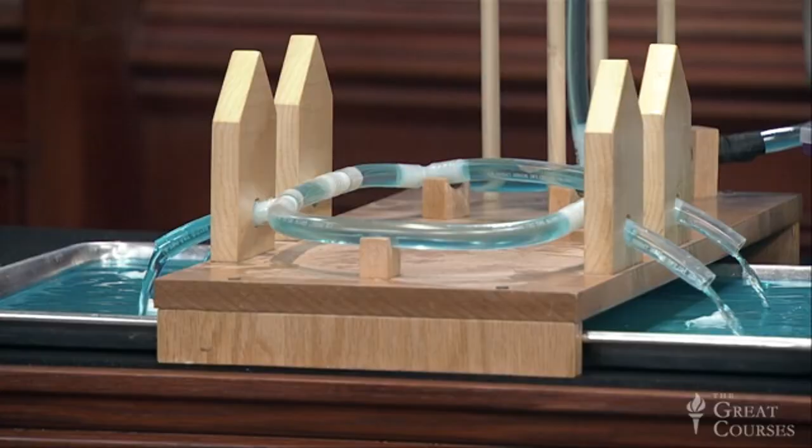The pump now can't keep up with a sudden surge in demand. That's okay, because as the pressure in the water main drops, water automatically begins flowing back into the pipe network. In effect, the water tower is now providing additional pressure to help the pump meet peak demand.

Now, later in the morning, people head off to work and the demand drops off considerably, perhaps even enough for the water tower to begin refilling, but only till dinner time, when demand peaks again and the water tower once again supplements the pump. Finally, night falls and the cycle begins again.

Now, 2 aspects of this ingenious system are worth emphasizing. First, it's highly efficient, because without that water tower, a much larger pump, or perhaps several larger pumps, would be required to meet the peak demand. Second, the system is robust, because the tower will continue to supply water even if a power failure shuts down the electric pumps.

Most municipal water systems are required by law to have backup power systems, typically diesel or gas generators, for their pumping stations. But backup generators won't necessarily kick in instantaneously after a power outage, so the water tower is critical for providing continuity of supply. This is particularly important because water distribution systems supply fire hydrants as well as residences and businesses, and the emergency that knocks out electrical power might be a fire. That's why an intermediate storage facility is usually designed to have enough capacity to supply the municipality for at least one full day, plus the additional water required to fight a fire.

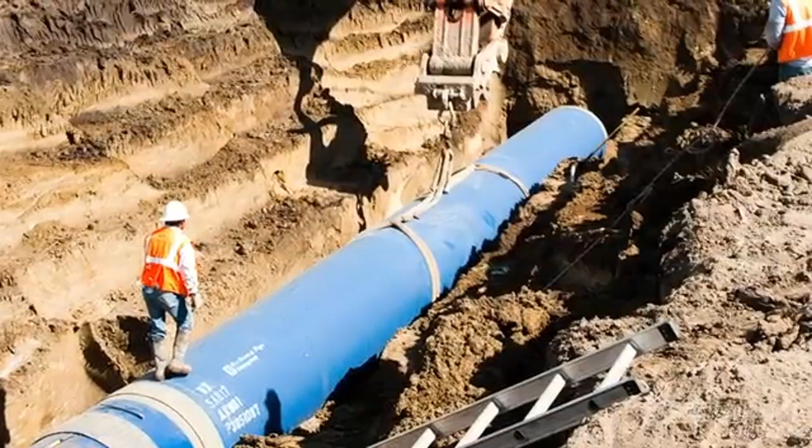Now, back to the water distribution network, which is somewhat less colorful than the water tower, but no less important. Water mains are large pipes, generally at least 6 inches in diameter, but often much larger, sometimes made of PVC plastic or steel, but most often made of iron, which resists corrosion better than steel. Corrosion is the most common cause of those water main breaks you're always hearing about on the evening news. These pipes are almost always located underground to protect them against freezing. The depth varies from 3 to 4 feet in the southern US, to 6 to 8 feet in the northern states, to 12 to 15 feet in Alaska.

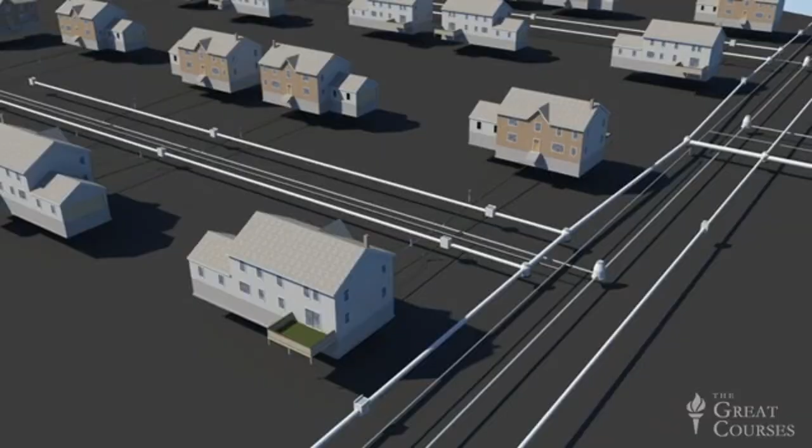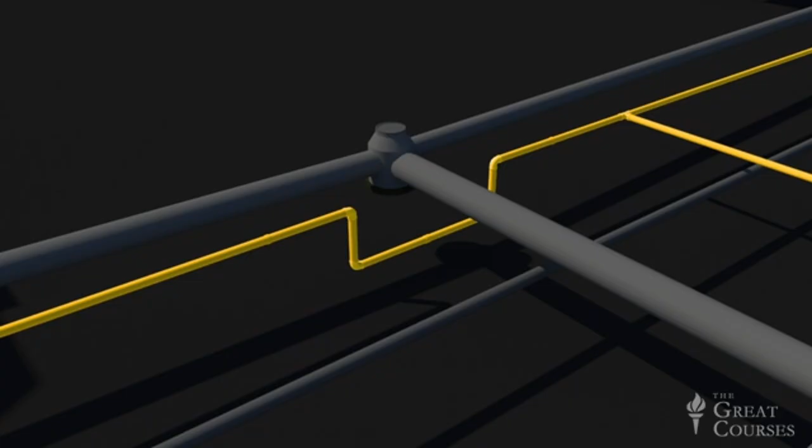As this computer model illustrates, water mains generally follow public streets because the municipality already owns the right-of-way here. Storm drains and sanitary sewers also follow the public streets, and because all three of these systems have distinctly different points of origin and destinations, there's great potential for them to interfere with each other. When such conflicts occur, it's always the water main that dips beneath or bends around the other two systems. Can you guess why?

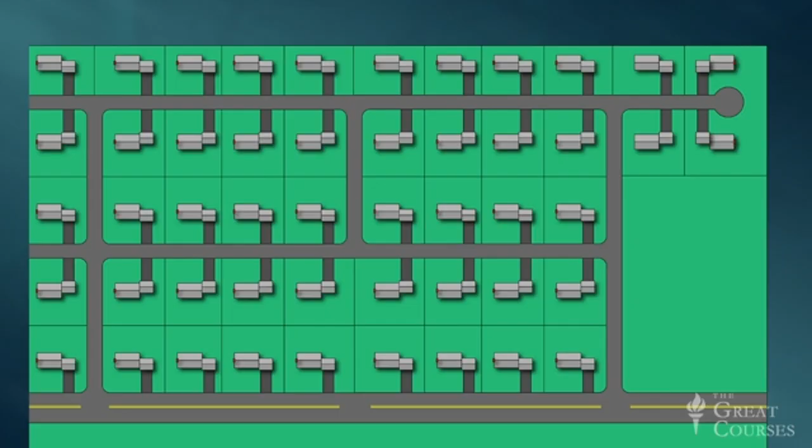Storm drains and sanitary sewers operate under the principle of open channel flow, so their channels must be constructed on a steady downhill gradient, without exception. Conversely, the water distribution system is the only one of the three that operates under pressure. Thus, water mains can change gradient and direction with no problem, even flowing uphill when necessary to avoid a conflict with a storm drain or sewer. For this same reason, water mains typically don't use the river-like topology we saw in storm drainage systems, with many small tributaries flowing into progressively smaller numbers of larger streams. Ideally, water mains are arranged in interconnected loops, which can also be visualized as a grid pattern. Dead-end branch lines are used only where loops are impossible, for example, at cul-de-sacs.

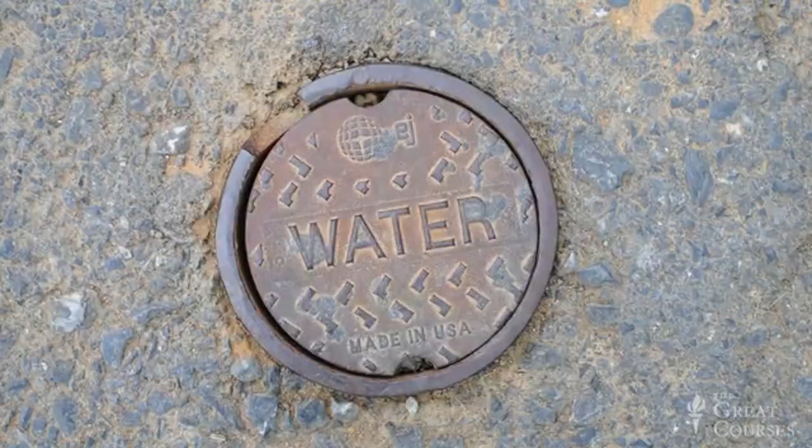So why are loops better than branches? Suppose the water main failed at this location—it would be easy to isolate this small section of the main and make the necessary repairs, disrupting water supply to only a very limited number of homes thanks to this looped configuration. Water can flow through a main in either direction, and because the system is pressurized, the water will always find its own path around a closed segment, like this. Of course, to fully realize this advantage, the distribution network must have lots of shutoff valves that can be used to isolate any segment of the system for maintenance and repair. Modern water systems do include lots of valves—when you see one of these metal covers at street level, there's usually a shutoff valve a few feet below.

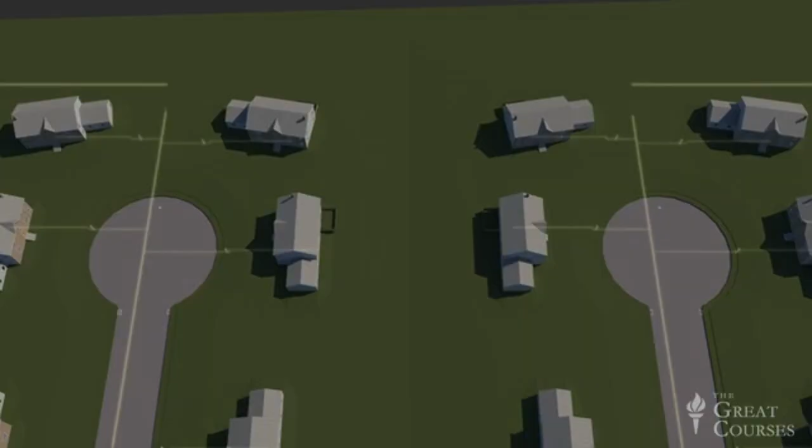On the other hand, with a branched topology, a failure here would cause many more homes to lose their water supply until the repair was completed. This situation is sufficiently problematic that in many municipalities, the developer is required to provide an easement, allowing the utility company to run a water main across private property to the next cul-de-sac, turning two branches into a loop like this.

The greatest challenge in designing a water distribution network is maintaining an appropriate level of pressure throughout the system. Most systems operate with water mains pressurized between 40 and 60 pounds per square inch, or PSI. As a point of comparison, the pressure in your car tires is about 30 PSI.

At pressures above 80 PSI, residential plumbing fixtures and pipe joints will start leaking. And below 20 PSI, the flow of water to a third-story shower head will be little more than a dribble.

If the region served by the water distribution system has large changes in elevation, the system must typically be divided into several pressure zones, interconnected with special pressure regulating valves.

Perhaps the greatest challenge in regulating water pressure is in a high-rise building, where heavy-duty pumps are required to move the water from ground level up to the highest floors. In general, 1 PSI of pressure will lift water 2.3 feet.

Thus, One World Trade Center would require over 500 PSI at ground level to move water all the way up to its highest occupied floor at 1,268 feet. Of course, this would cause the pressure at ground level to be impractically high.

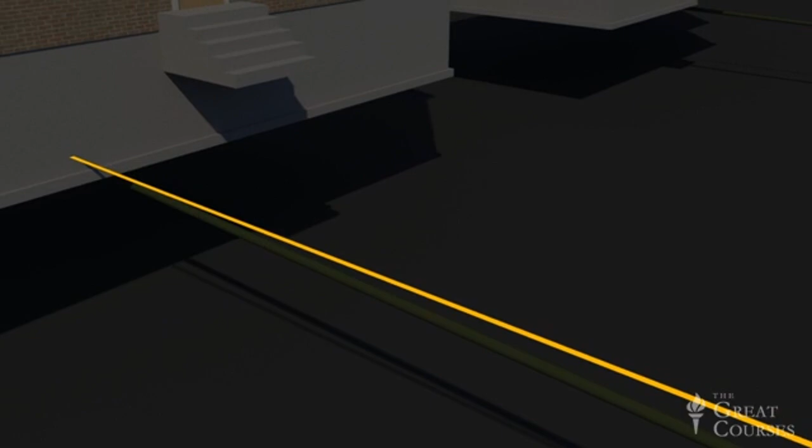Beyond the curb valve, the service line enters your home through a hole in the foundation wall or floor slab. Just inside is your water meter and an interior shutoff valve. This is the one you'll want to close to keep your basement from flooding when a pipe bursts.

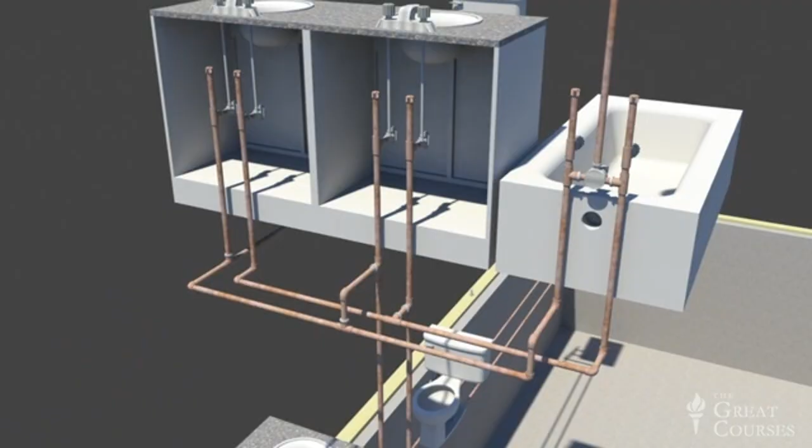From here, a separate pipe branches off of the main service line to supply the hot water heater. From this point forward, the hot and cold water lines run parallel to each other throughout the building, supplying sinks, tubs, and showers, while the cold water line also individually supplies toilets, exterior spigots, and perhaps an ice maker in your refrigerator.

Throughout this network, whenever you open a faucet, turn on a shower, use a washing machine, or flush a toilet, water flows freely because of the combined effects of a distant pumping station and a water tower, which supply the pressure that makes the system work.

But pressure is a double-edged sword. Water that's flowing through a pipe under pressure has considerable momentum. If the flow is shut off suddenly, by quickly closing a faucet, for example, the resulting shock, called water hammer, can damage pipe joints and fixtures.

To prevent water hammer, water supply lines are fitted with these air-filled expansion chambers, which effectively absorb the shock.

You open a faucet and clear, clean water flows. Let's close today's lecture by reflecting on where that stream of water originated: as surface runoff in a distant watershed, impounded as raw water in a reservoir created by a dam, collected and transported through an aqueduct to a water treatment plant.

Clarified, filtered, and disinfected through an integrated series of physical and chemical processes, and then delivered to your kitchen sink at just the right pressure by a robust, redundant network of pumps, pipes, valves, and water towers. This is the epitome of everyday engineering, an immense, integrated, multi-dimensional technological system of which we're largely unaware, delivering this precious, life-sustaining substance on demand.